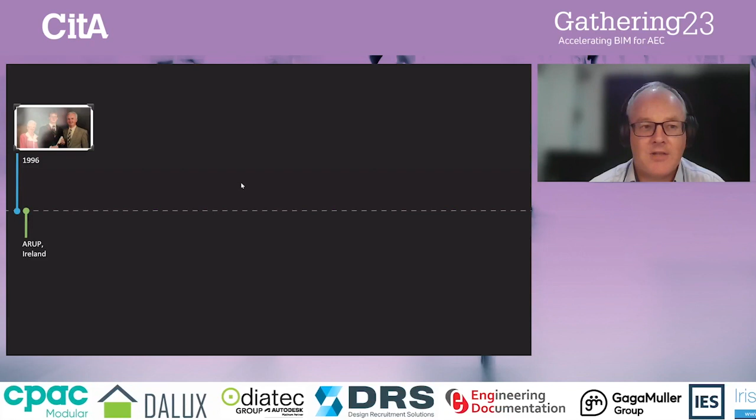So very briefly, I graduated in '96. I worked at Arup. The first model that I came across was in 1999, working on the Irish Expo in Germany. And that set me on my path to where I am today.

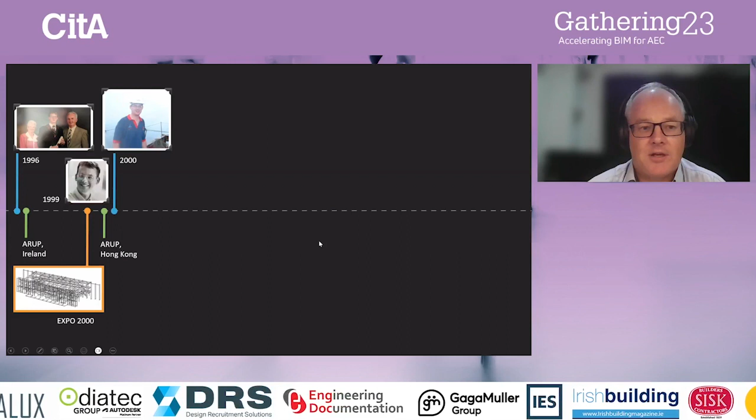I moved to Hong Kong in 2000, and I created my first company in Hong Kong in 2003. So in 2003, when I set out to do BIM, we were looking at things like modeling and design coordination.

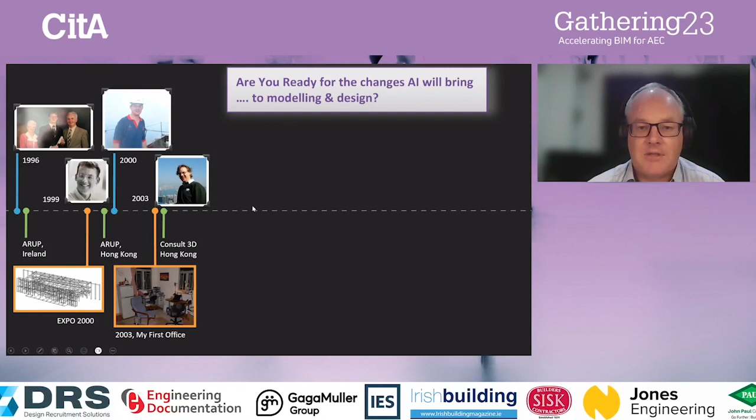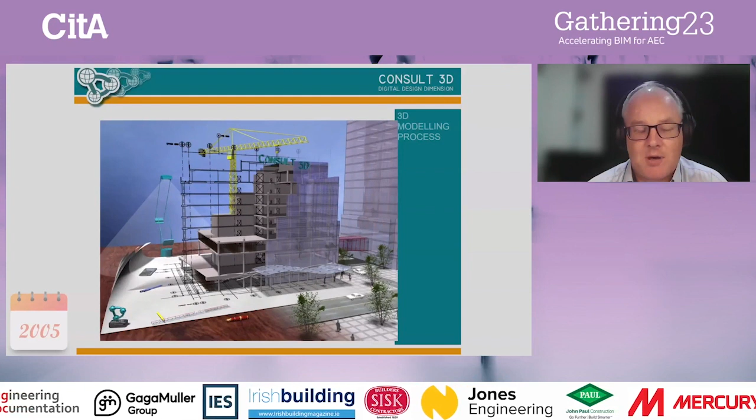I'm actually going to share with you some slides that I presented 20 years ago. These will be relevant to some people today, but this is what it looked like 20 years ago. So this is a model that we created, and we basically use the same principle. You make a model of the structure, you model as much detail as you can, you model all the mechanical systems - ductwork, pipework, cable trays.

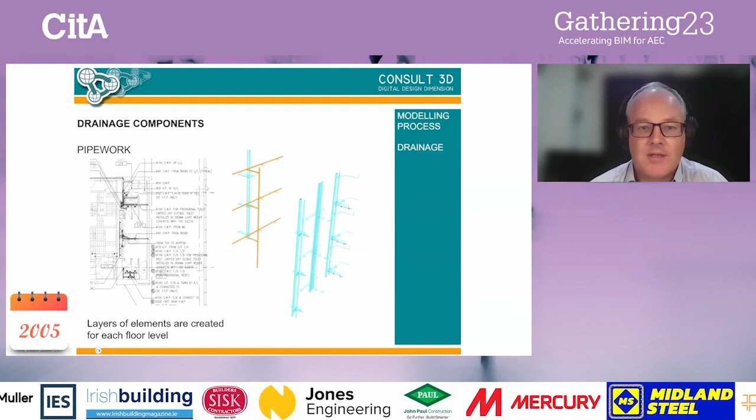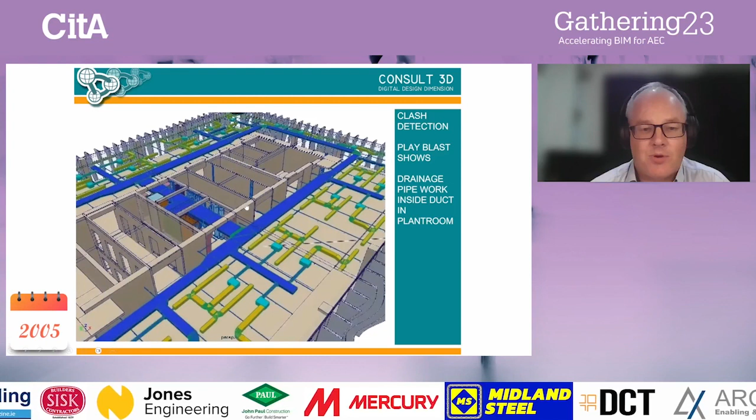Anybody who does BIM now, this is common practice. And then you put all that together into a federated model. In 2003 and 2005, we were using things like CAD - this is pre-Revit. And we were basically visually checking the models to see if we could find coordination issues.

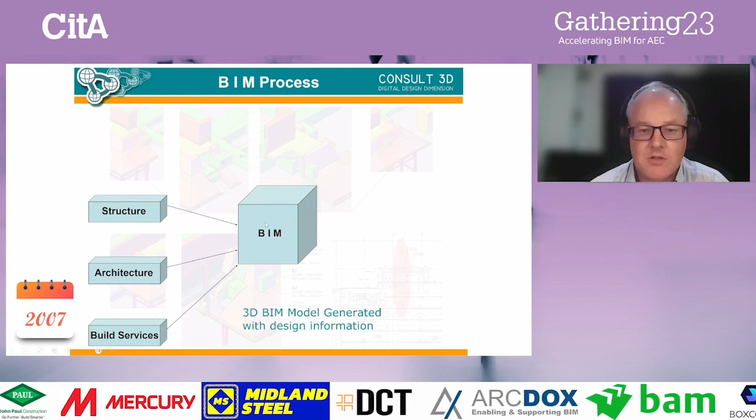Jump forward a couple of years to 2007, when BIM became kind of the first iteration of BIM, if you will. The idea here being that everybody works in a central model of some description. The consultants all work in a 3D modeling environment. They do their coordination, they do their clash analysis, and then they do the drawing production. So you end up with your contract drawings, your schedules, and your budgets.

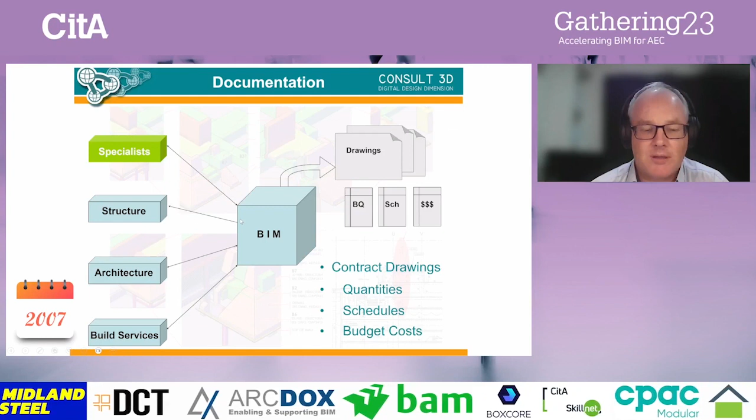So the interesting thing here is some people say BIM is new, but it's not really new. It's at least 15 to 20 years old. And then, as far as I can figure out, in 2007 was the first time I came across the term of a BIM manager. And then you have all the different roles inside the different design teams.

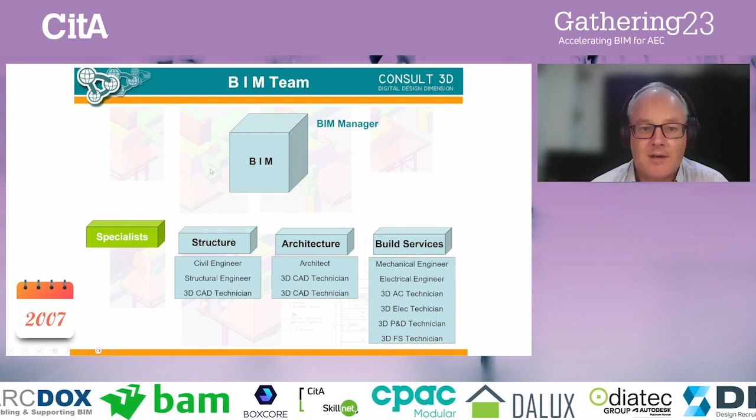So these are a couple of slides from the company that I created way back when. Now, what's interesting is when you compare what was going on 20 years ago and you look at what's happening today, the standout again is Autodesk. So Autodesk were behind Revit. They drove the changes in the industry. They drove the promotion of BIM quite heavily at the beginning.

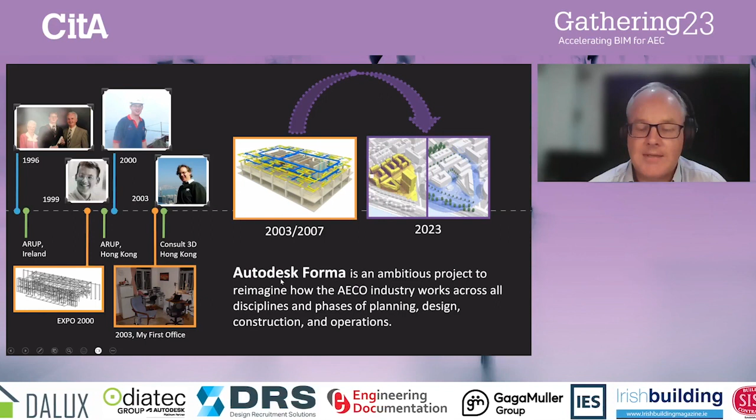And now when you look at what they're doing, they're about to change how we do work in the industry again. And the reason I say that is I was at a presentation only last week in Singapore, and they talk about this Autodesk Forma. Forma is going to change the way we deal with data in construction, at least in Autodesk's mind. And what I want to share with you is just a couple of snippets from an advertisement that's currently on LinkedIn.

So if you're looking for a job in Autodesk, these are the things you're going to want to look out for. So they're going to bet big on AI. And to do that, they're going to use Forma. So they're on a mission to reimagine the way the customers capture, utilize, and exchange data. They intend to empower our industry, and this is classic Autodesk language, and how the professionals use data to capture, inform decisions, and deliver projects.

So it's going to be all about the data. And what's interesting about Forma is they're going to change how data is stored, how it's going to be exchanged between companies, and then they're going to build applications on top of Forma. So this is going to create a data infrastructure on which Autodesk future AEC products will be built.

And what's alarming about this is that Autodesk have got access to huge amounts of project data. What's not clear is how they're going to handle that data, how they're going to sanitize the data, whether they're going to ask people's permission to use the data, et cetera. There's a lot of unknown questions about what data they're going to use and how they're going to use it. But it is interesting that Autodesk are all in on AI. So this is where we are in a 20-year leap. We've gone from modeling to data products by the same company.

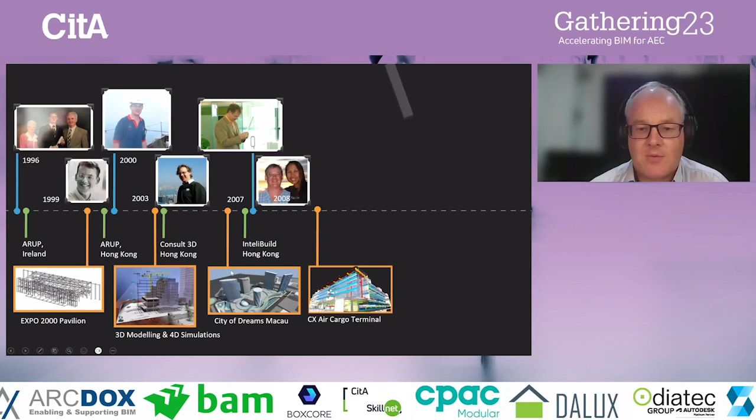So going back to my rapid career path, in 2007, we restructured the company and it became InteliBuild, which is when I first came across it, I believe, when I was talking at a conference. 2008, I met my wife, and at that time we started working on the biggest BIM project I did then, and probably still to my career this day, which is the Cathay Cargo Terminal. So I want to talk to you about what's changed in the way we design and do coordination between 2007, 2008, and current day practice.

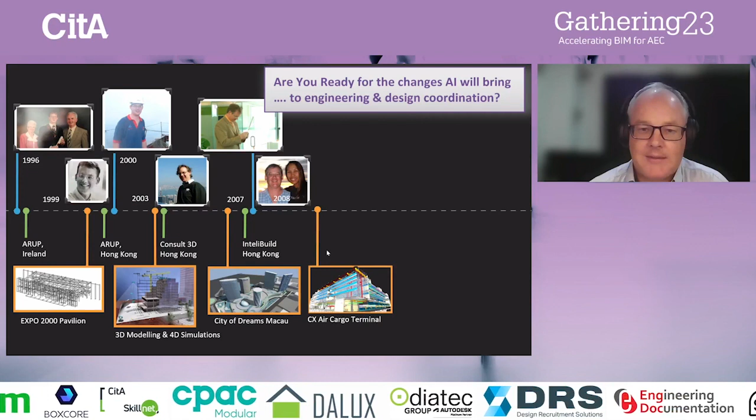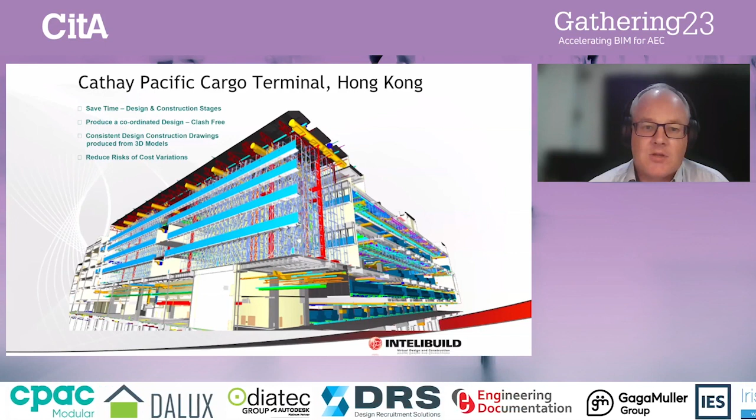So back then, the intention of the model for Cathay Pacific was that we would do BIM correctly, and we would produce a coordinated so-called clash-free design. So again, I dug this out of an old presentation, and I thought this is quite funny. To me, this is the first digital twin I came across. So I hope this works across Zoom. Let's see. Yeah, there we go.

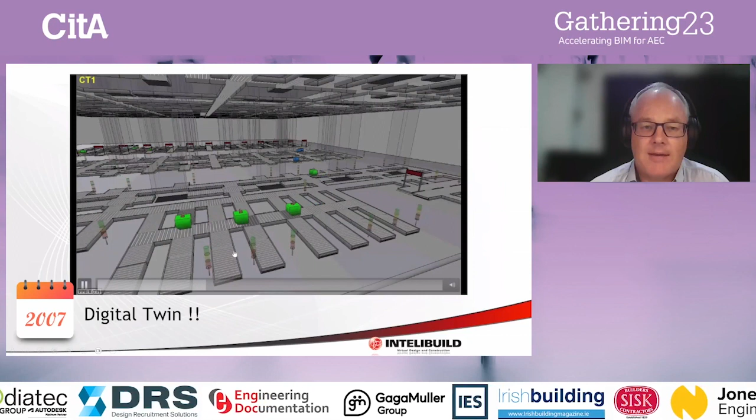It is working. So what this is doing, it's simulating the actual processing of cargo through the air terminal. It's based on the actual flight logs for the projected traffic of the airplanes. It's based on the capacity of the actual cargo facility, and it was used to validate the design, and then it was used to build operational models. So again, anybody who thinks digital twins are a new phenomenon, we were at this in 2007.

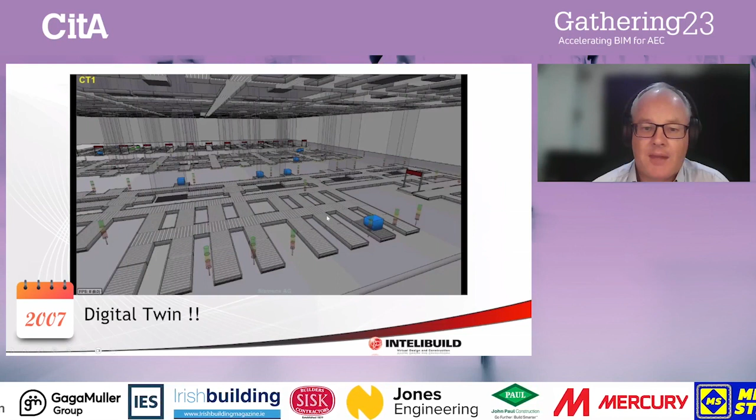And just digging into the models, just to set the scene, Revit Structure was used. So this was an early version of Revit. I think it was the 2008 version. And then back then, we could put basic data into the models. So we were able to identify particular types of structure with an architectural model. And then we had all the building services models. These are all the design models. So these models are produced by the design consultants.

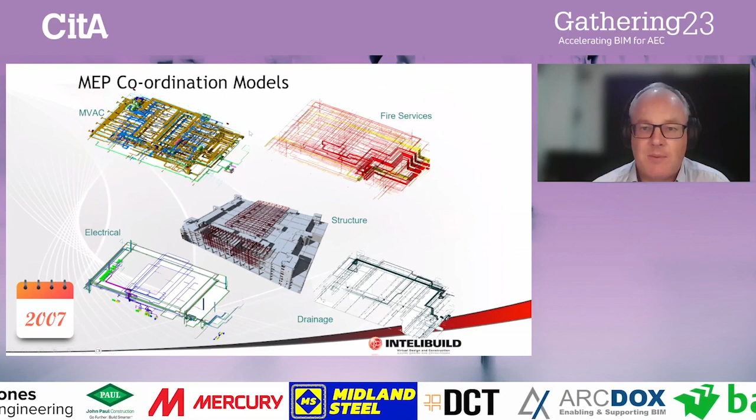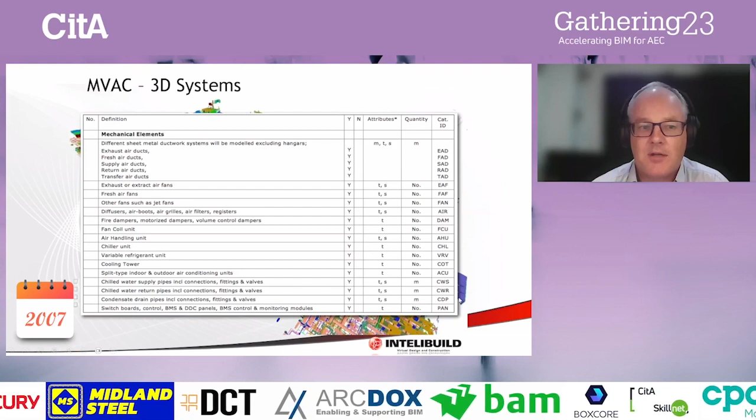And the first thing we learned was designers shouldn't really be doing MEP coordination because the contractors are the ones that actually know how to do that. But we had to come up with the design of the system. So we got all the different systems. And back then, this was pre-Uniclass. So for people who now use classification systems, we had to come up with our own classification system. So we had a coding system, which was mainly used to drive coordination and clash analysis.

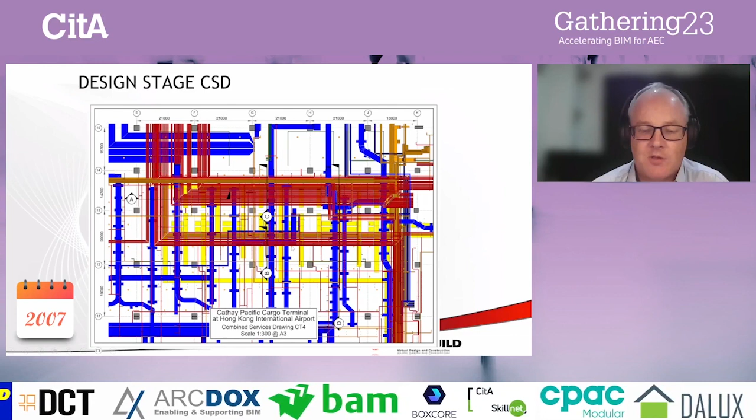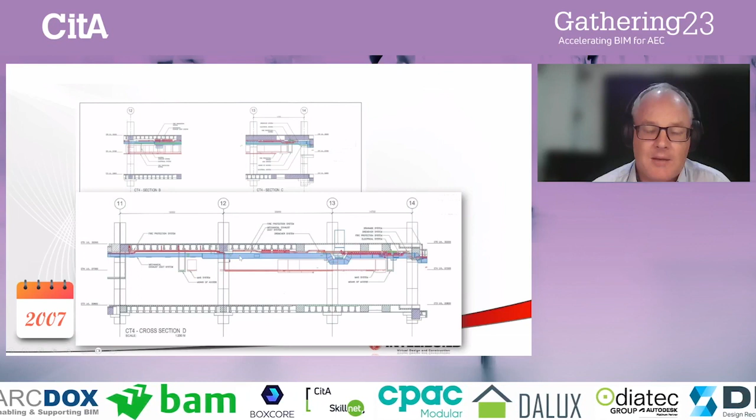We used the models to produce drawings. So this is a snapshot of the fire sprinkler system. You can see it's quite a heavily serviced building. And then we used Revit to actually generate drawings from that. So we used color-coded drawings coming out of the models. So again, if you're not already using Revit to generate drawings, there's a big question mark as to why. And then what I thought was interesting was these slides came out of this old presentation, and it was actually a very early version of what is now ISO 19650 processes.

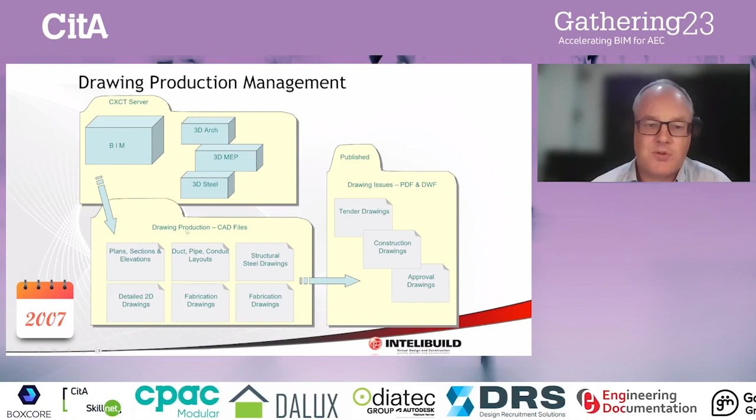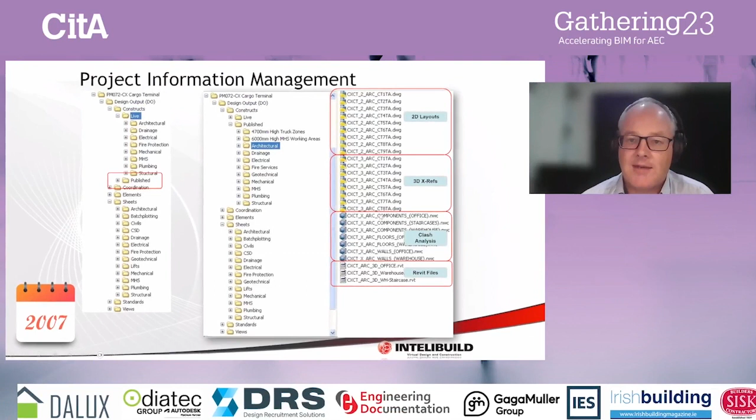So this was the original BS 1192 process where you have a drawing production system and a publication system. So we had a very particular folder structure, which I still use on my projects in an iterative version of it, but it's still the same logic. So you have a live information folder, you have published information, you have all the different formats of the data in one location, so it's not broken down. And then you basically have all the drawings in a shared environment. So you have each of your different contract drawings and contract drawing sets.

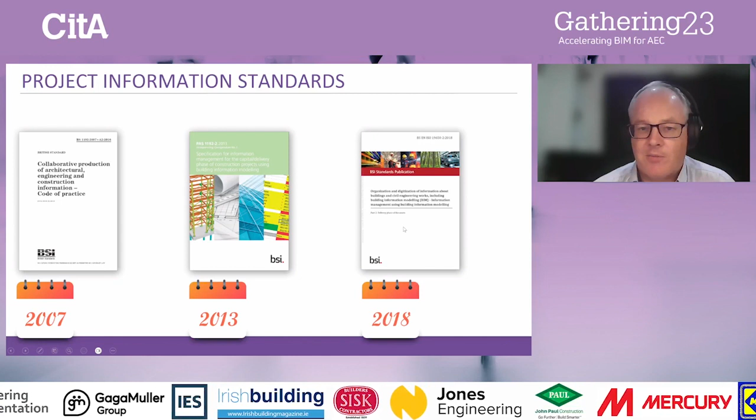So as I mentioned, this was based on BS 1192, which obviously became PAS 1192. And then since then, we've obviously developed ISO 19650. And what's stunning is even though 19650 has been around at least 5 years, I can count on one hand the number of projects that are actually using it correctly, at least in my area. So these standards, while they've been around for a long, long time, our industry is struggling to actually apply them consistently and coherently.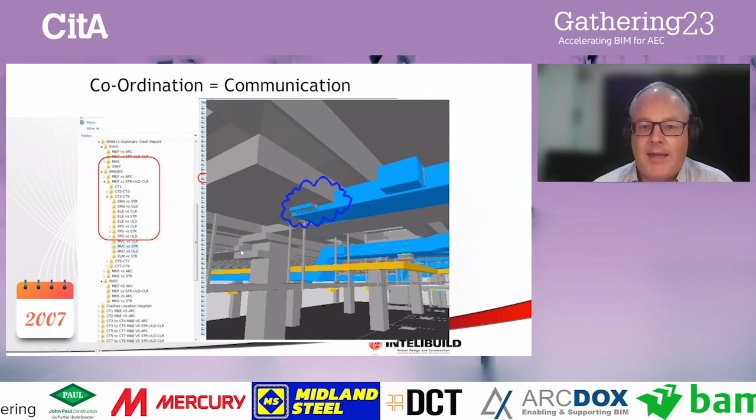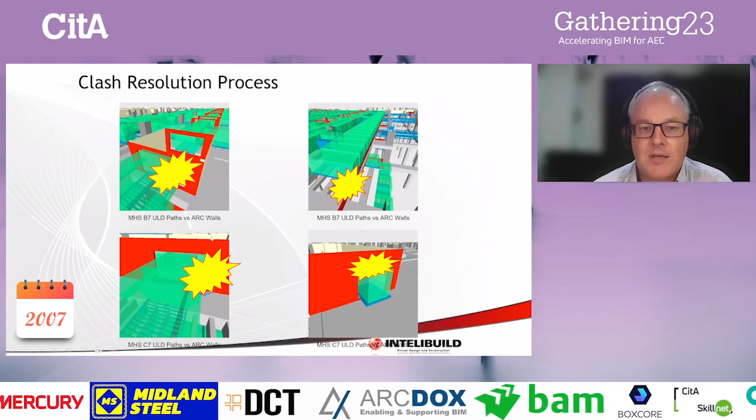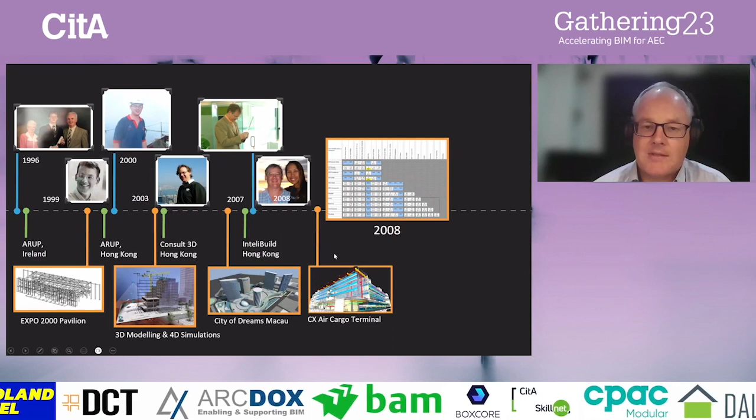There was no system for assigning issues. There was no way of managing the issues. It was a very labor-intensive, manpower-eating process. So again, that project in 2008, while it was extremely complicated back then, it did lend itself to developing a number of practices, at least in my business. And when you compare what's going on now, the tool of choice is Revizto.

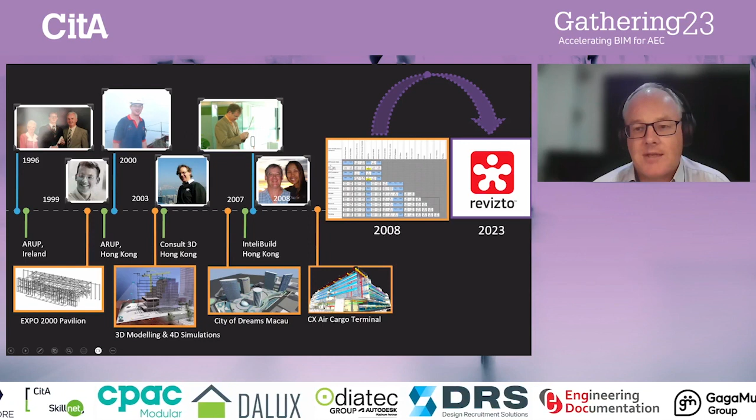And I'm sure, while I don't know exactly what they're up to, it'll only be a matter of time before they start using AI to improve that coordination process. But right now, Revizto is the way to do coordination and modeling. So again, there's been a major evolution from the manual process that we had in 2008 to the process that we do now in 2023.

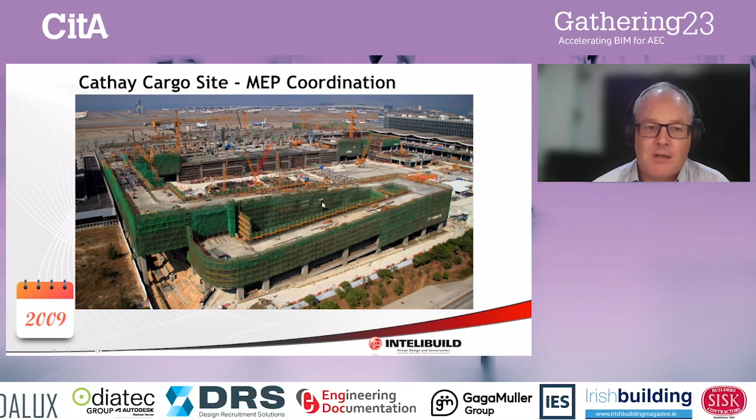So jumping forward, I just want to show you a different way of looking at this. Once we got to the construction project, the learning was massive because the amount of work during the design stage wasn't sufficient for construction. So we basically had to remodel the whole thing for construction. And one of the challenges that we had during the construction phase was identifying discrepancies between what was in the model and what was happening on site. And this is where technology has changed. This is where AI is having a massive impact.

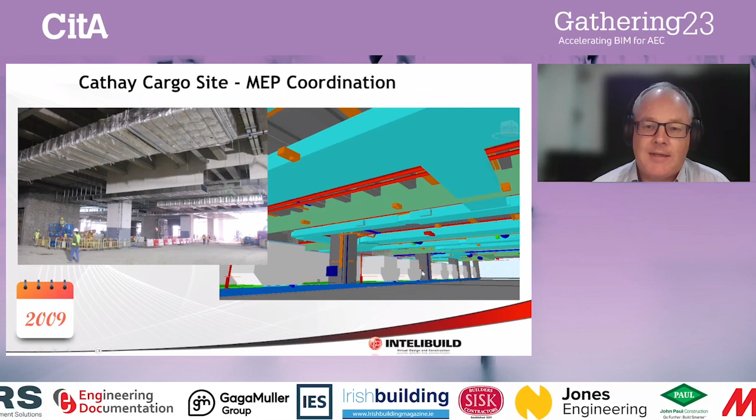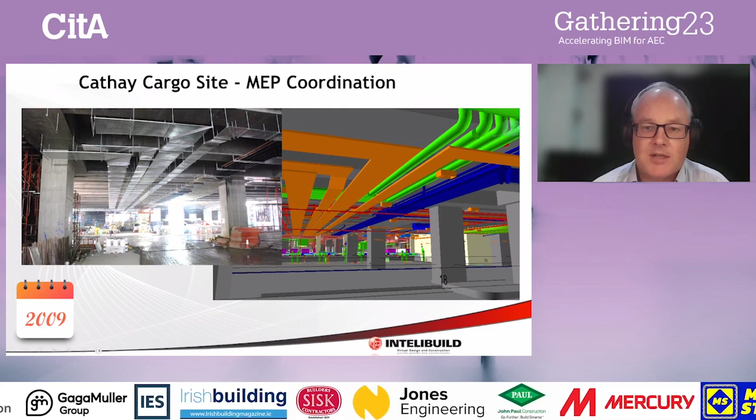So this idea of being able to link the model to the job site, rather than using cameras, the smartphones, and just taking photographs, which is what we were doing in 2009. We would walk around, take a bunch of photographs, then go back and check the model and see what was going on. I'm going to show you how that's changed with augmented reality and AI. So these are basically some basic snapshots of what was in the model against what was installed on site. And you can see they're pretty much the same.

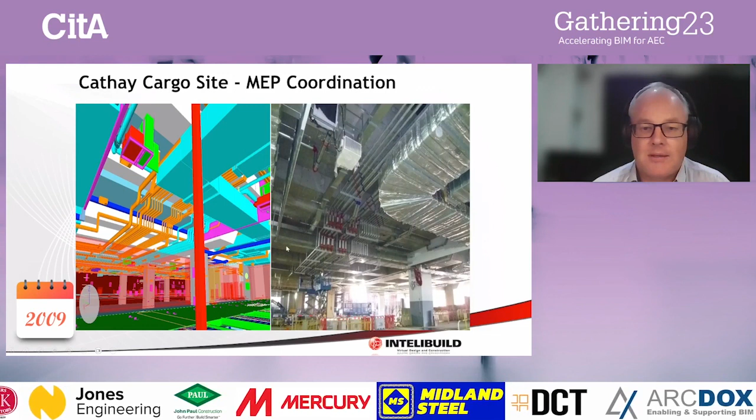There's always going to be variation, but it was a very manual process. So you would send out a guy on site, it would take a couple of hours, and then you would get a lot of information back. And then you had to go through the model. It was labor intensive. So if you take what we did in 2009 and you jump forward 10 years to 2019, what has become immensely powerful is augmented reality. And if you've not seen this in the real world, I highly suggest you go and look this up and try it on your projects.

You do need to have a BIM model to start with, but essentially what you're doing is you're using an iPad device. I prefer the iPad as against the helmets because when you start putting this technology on people's heads, first of all, it's quite heavy to carry around on your head all day. And second of all, it's not quite as practical, in my opinion. I'll always argue the toss with the XYZ boys, but that's where we sit at the moment. So using the iPad is a way to do it.

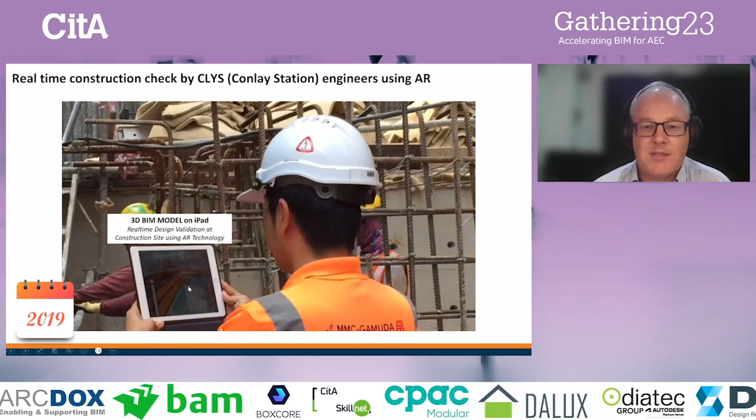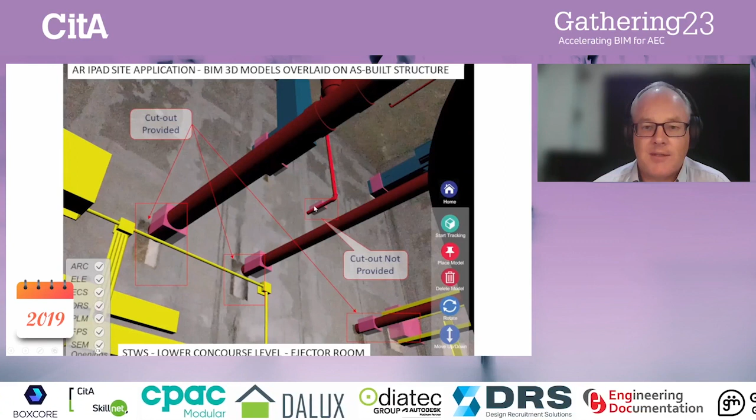What you can do is overlay the model into the actual site environment. So you can actually start to check, have I got the openings in the right place for the future installation of pipework? In this case, there's one missing, so we can identify quickly what has to get fixed. You can also use it for rebar inspection, making sure all the openings and cast-ins are in the right place, as part of the inspection process before we cast any concrete, doing our QA and QC to make sure things are done correctly.

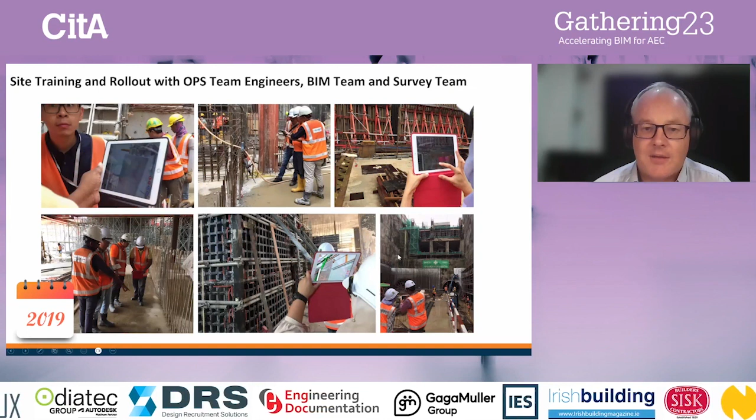Augmented reality is a technology that is getting more and more powerful, and AI is having a major impact on it. You can use this to mark things up.

So that was a quick leap from 2009 forward. In 2012, I got married to my Malaysian wife.

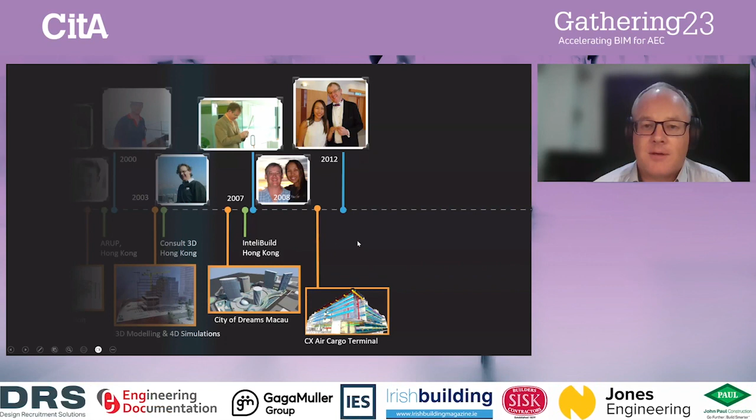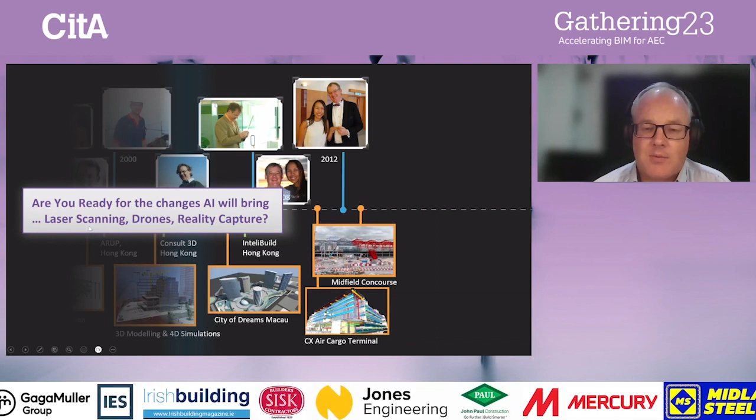We started working in midfield concourse, and this is where the technology has changed dramatically, certainly in the last 8 years. Where AI is going to have a massive impact is in the world of reality capture - laser scanning, drones, and reality capture is where AI is having an immediate and massive impact.

And the reason I say that is, again, experience. On this project in Hong Kong, we had to build this very complicated roof structure at the Hong Kong airport. This was the design model, and this is the fabrication model.

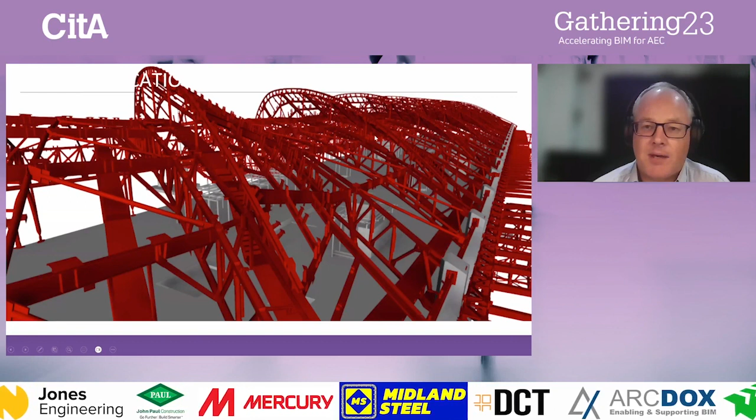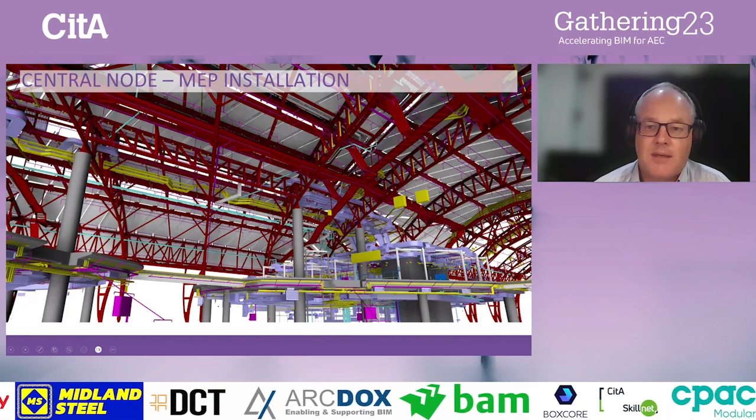I think I presented this at a CitA event in the past, but this is a very, very complicated structural steel model with exposed steelwork, architecturally exposed on the bottom chord of the truss. There's a lot of access ways into the ceiling space, a very complicated paneling system, and it's a typhoon-loaded airport because it's in Hong Kong. Beneath the roof is a very complicated air conditioning, fire sprinkler, and communication system, and all that is wrapped up inside this doubly curved ceiling system.

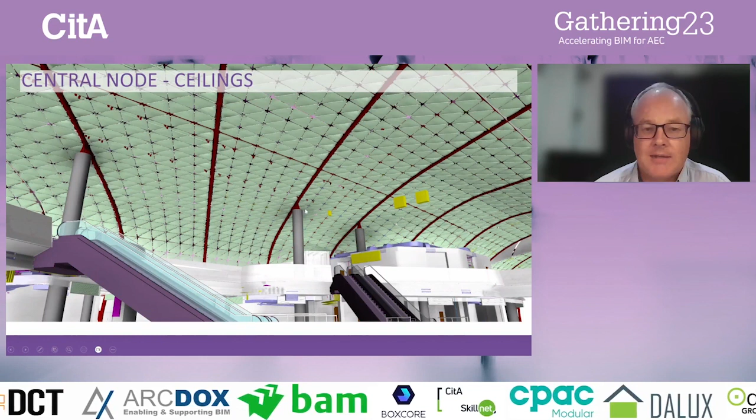We had to make sure that the steelwork was in the right place before we started installing all the mechanical electrical systems. Here you can see these exposed chords. So in order for us to verify the installation of the steelwork during construction, we started using laser scanning, scanning all the steelwork as it was erected and put in place, then using those point cloud scans to verify against the models.

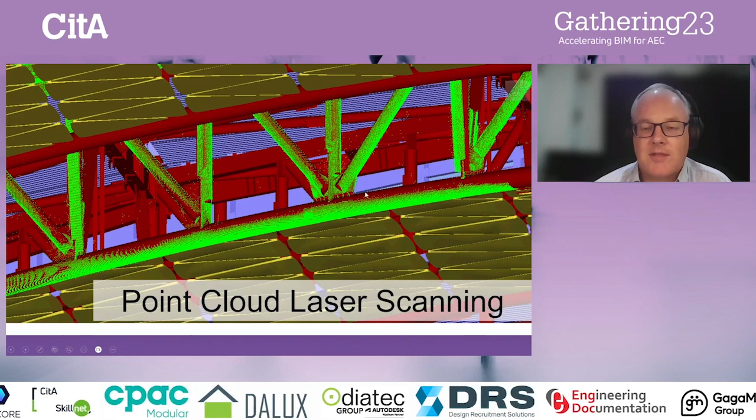Now, this again was a time-consuming process. We had to learn how to do the surveying, how to get the right coordinate system set up. We had to make sure we had the right data points, and then we had to figure out how to compare them to the models.

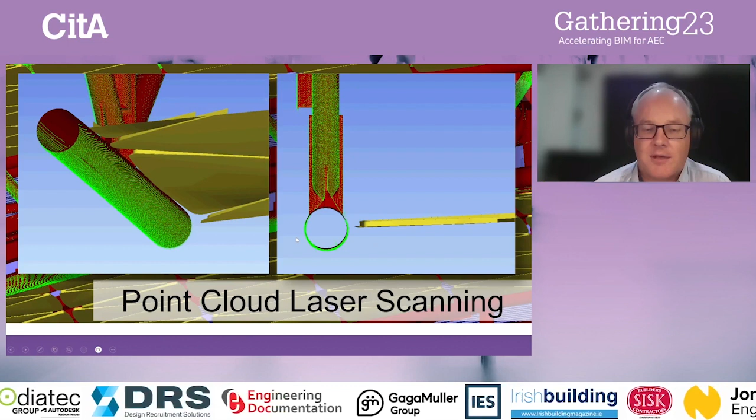AI has now transformed all that to make it really slick and very quick. I would go so far as to say that you don't even need laser scanning anymore - you can do this with photographs. With a proper 360 camera and a proper bit of logic, you can actually do the same process now, quicker, faster, and cheaper.

We started off with complicated steelwork, but what was interesting was we very quickly started realizing it had many, many more use cases. We even got down to simpler steelwork - this is the link bridges - and we just started looking at cleats and plates and looking for out of tolerance. So you can start making use of these tools for many, many things once you start getting up and running.

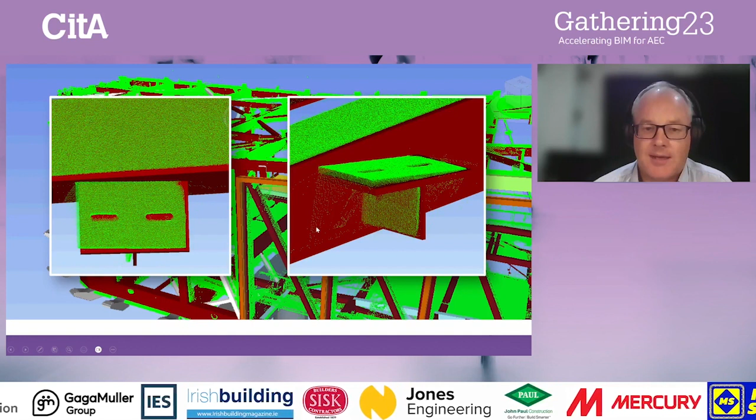So that was 2012, 2014. And my son was born in 2014.

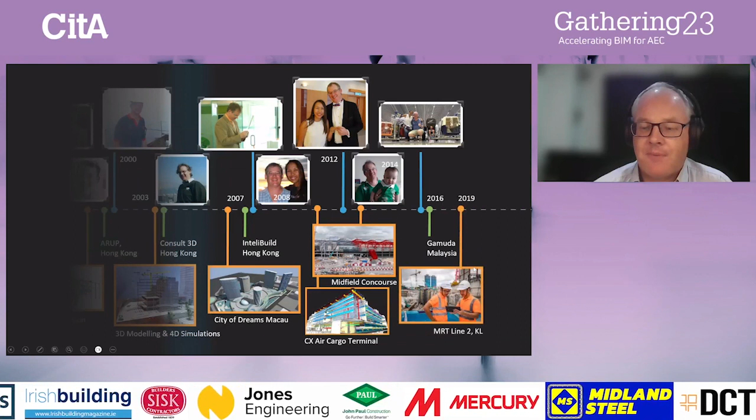In 2016, we moved our family here to Malaysia, and I joined the Gamuda guys to work at MRT. And this is when we started using drones for photogrammetry.

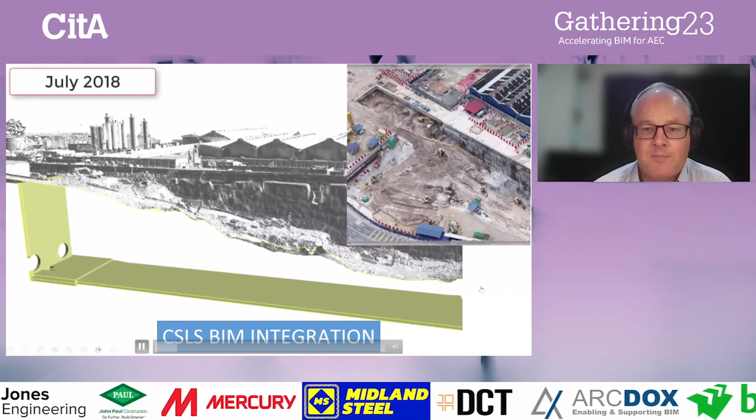I'm going to combine the use of laser scanning, drones, and 360 cameras under the umbrella of AI. But this is just a quick demonstration of how we use the drones in one example. So we use the drones to create 3D models, basically called photogrammetry models, generated from a series of images taken by the drone.

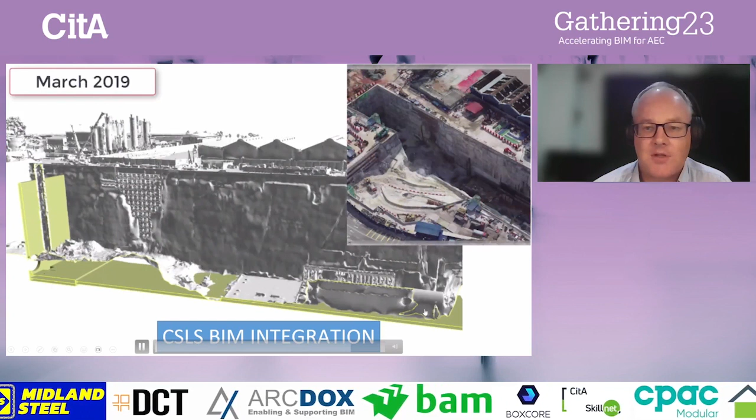What we're doing is comparing the construction progress, the reality of it, against the intended foundation of the railway station. This is an underground railway station, so it's an open cut excavation stood in rock, a very stable excavation. It's a great example of how drone technology can be used to monitor progress, and this is where AI is having a major impact.

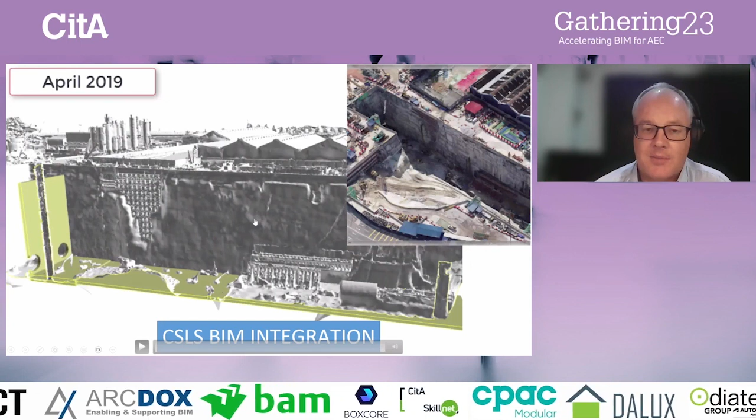That basically ties me into where we are today. What's interesting is when you look at 2023, my son recently turned 9, and in his lifespan we've gone from doing manual clash checks to exposing ourselves to some brilliant AI technology. I want to draw your attention to a couple of tools that I find really, really powerful and that are going to make a big impact.

Cupix, Reconstruct, OpenSpace, and Nazca are all AI fundamentally powered tools in the reality capture space. They use 360 imagery, models, laser scanning, and drone imagery, and they can start doing a variety of different things in the space.

If you look at the Nazca presentation done at AU last year, they can identify in the computer algorithm objects that are missing from a building project, or objects that are out of tolerance. If you look at OpenSpace, they can tell you where you are against your actual schedule. Reconstruct have an integration with Primavera, so you can see where you are against your actual plan. And Cupix have got some very clever technology around analyzing the building.

They're going to make a big difference in our space, but they're all in the reality capture side. There's not much AI in the design coordination space that I've come across yet, apart from Forma, which Autodesk are basically unveiling at the moment.

To wrap up my presentation and keep on schedule, in order for you to be ready for the challenges, I think AI will propel some firms forward. Those that have been successful in BIM will be immensely successful in AI. Those who are struggling in BIM are going to struggle in AI. So I think you've got to figure out what you're actually doing.